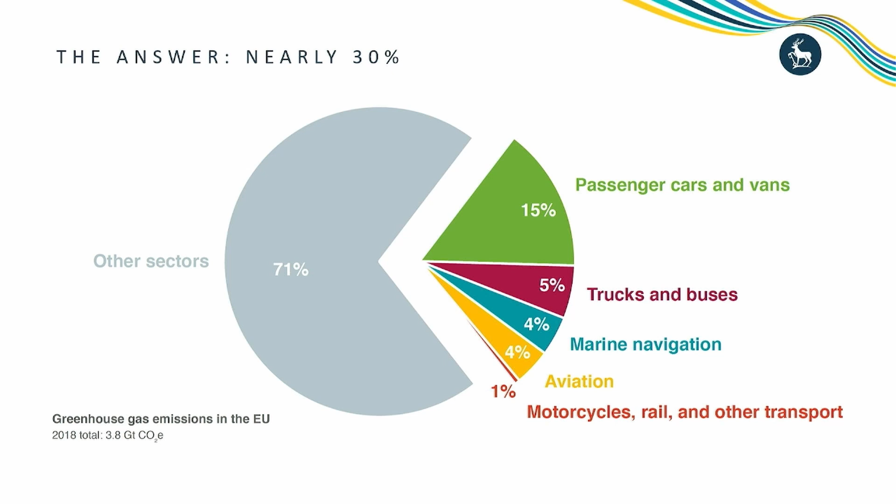And that's why I think hydrogen vehicles, or hydrogen as a fuel, has been on the table to initiate the discussion. I'll try to make my presentation a little more generic because it's IET - we have different engineering backgrounds. So forgive me, it's probably going to be a little bit boring, but I will try to deepen the topic a little with the presentation.

If we look at the normal way, I think quite a lot of us still drive a traditional ICE, internal combustion engine, that is powered by gasoline or diesel. And if we look at really how it works, using octane as an example - traditional cars burn the fuel, so that's a chemical equation.

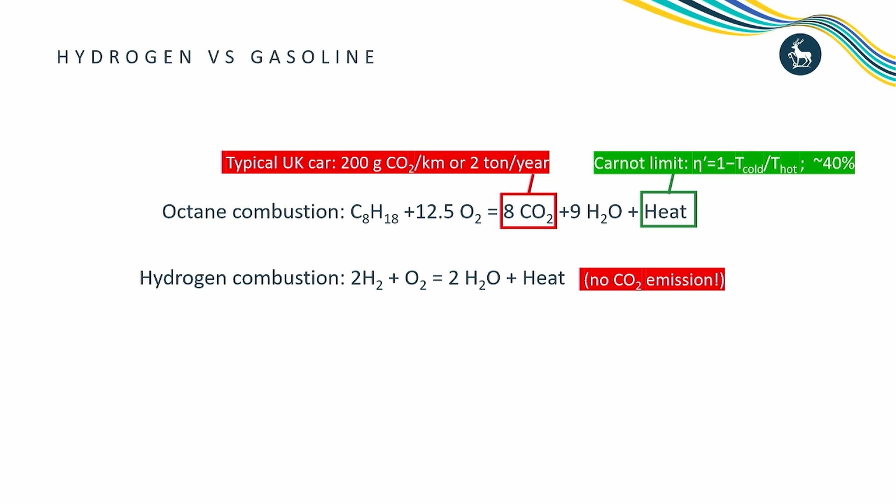And then people look at hydrogen combustion. It's much simpler - you can see if you look at the chemical equations. That's only 2 hydrogen molecules react with 1 oxygen, you get 2 water and heat. That's good because we have no CO2 emission within that equation. So that's a fundamental reason, I think, people try to use hydrogen as a fuel. But if you look at that equation, burning the hydrogen, you still generate heat and then use the heat to drive your engine, then you cannot bypass the Carnot limit. So people start to think, is there a better way of using energy?

So how about if we use electrochemical methods? Electrochemically, you can still have almost the same chemical reaction, but instead of generating heat, you can generate electricity. So when you react hydrogen and oxygen, there's a way that we can release the energy in the molecule in the form of electricity, and then we can use the electricity to drive the electric motor and drive the vehicle. And the benefit of that is you can get rid of that Carnot limit, and there's almost no limit. The only kind of thermodynamic limit you have to deal with is the entropy associated with that. So the overall reaction can be very, very efficient, up to 95% or higher. That's the beauty of using hydrogen electrochemistry - that's the fundamental chemistry of the fuel cell operation.

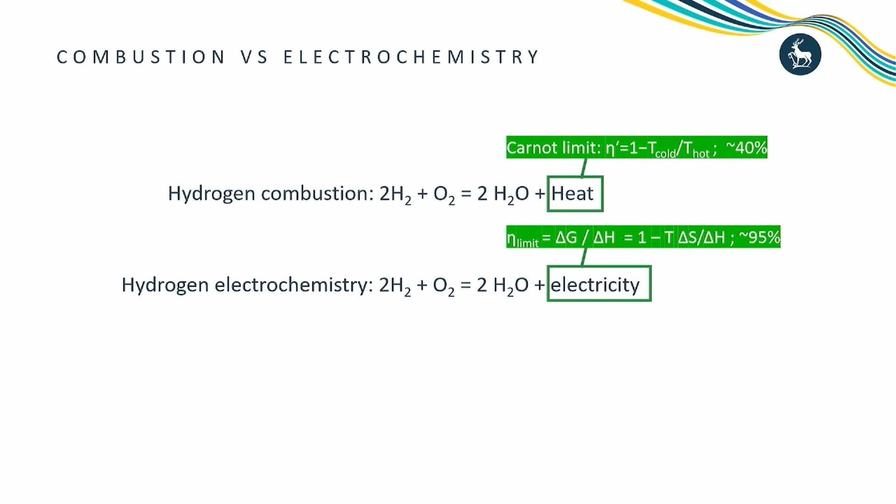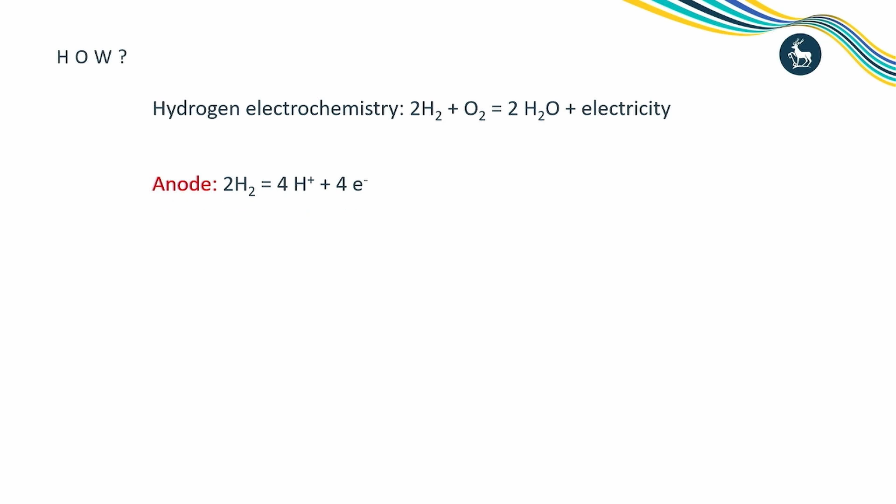Okay, so you will see how, right? Imagine when you put hydrogen and oxygen together and put a fire on that, it explodes and you get heat - that's the traditional way. So in order to generate electricity, you have to split the reaction into two parts. That's the beauty of electrochemistry.

So you want to have the anode side and the cathode side. The way a fuel cell works is you get the hydrogen to be split at the anode side to generate hydrogen ions and electrons. And then what happens is the electrons, once generated - that's the yellow dot - will go through the external circuit. That is, when the electron moves, that's a form of electricity. And then the hydrogen ions will go separately from the electrons through a so-called proton exchange membrane to the cathode side. And then at the cathode side, that hydrogen ion reacts with the oxygen together with the electron that travels from anode to cathode through the external circuit, to generate water.

So through that way, you can see the overall reaction is the same, but if you split that into two electrodes, then you can capture the energy in the form of electricity. So that is the fundamental fuel cell.

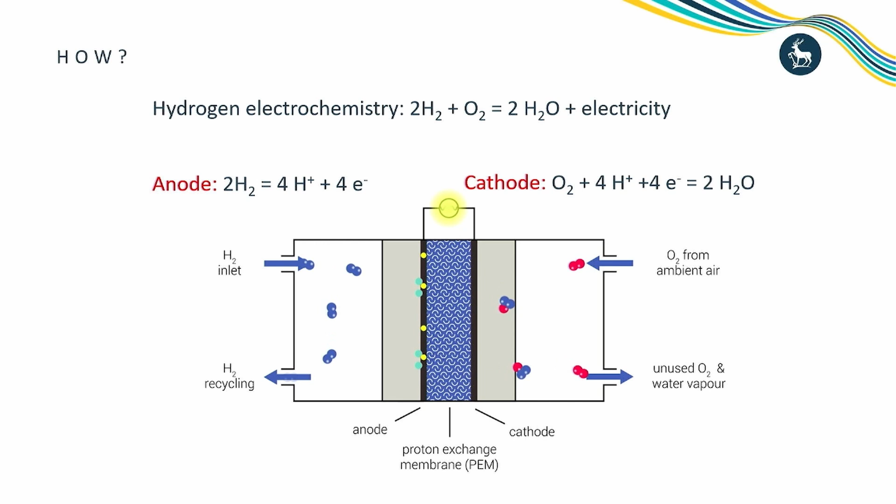And now we have got the fundamental science right, and with a little bit of engineering, you can build a fuel cell car. Okay, so this is the Mirai fuel cell car, probably one of the most famous fuel cell cars.

So basically that's the fuel cell. The fuel cell is installed in the front part of the car. You of course have some hydrogen tank to supply the hydrogen, and then once the electricity is generated, it will drive the electric motor to drive your car, to drive the wheels.

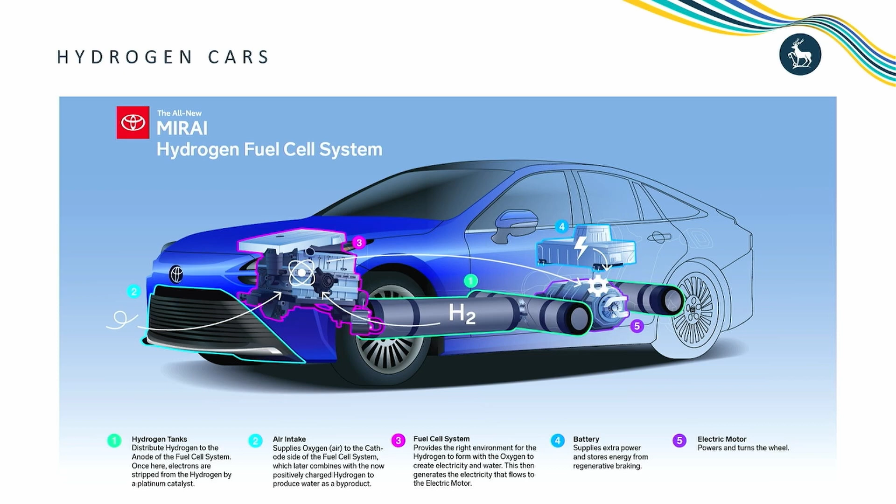So that is the engineering of the fuel cell car. It's always easier said than done. If we look back at the history of the fuel cell, it's almost 200 years ago, invented by Sir William Grove, a British chemist. Actually, he's a Welsh chemist. It's kind of the very first prototype.

At that time, they called it a gas battery. So what they did was have oxygen gas sealed in one of the tubes and hydrogen gas sealed in the other part of the tube, and they inserted two electrodes into the tube. Then suddenly they found, Sir William Grove found, that you can generate electricity. So they called it gas battery.

So Grove was the father of the fuel cell, and you can even find Grove's statue in Woking Park. It's not far away from the campus in the wider Surrey area.

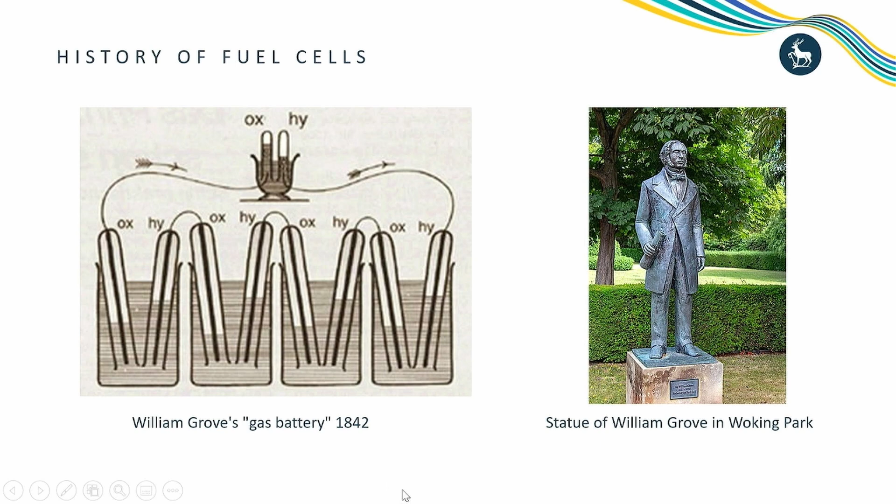As I said, it was invented quite a while ago, but unfortunately it didn't benefit much until the space program back in the 1960s. It's fair because you can find probably 100 better ways of generating electricity than a fuel cell, because it's not a particularly simple process. But NASA saw its potential because in space you want a reliable system, you want a high energy density, and at that time normal batteries couldn't fulfill that requirement. So NASA built the first engineering system of fuel cell and put that in the space shuttle.

So actually the fuel cell is one of the power sources that sent humans to the moon. They are very smart. The fuel cell generates electricity to power some of the service modules. And if you still remember, the only byproduct from the fuel cell is water. So the water can be used as a drink for the astronauts. It's a very close, smart design of the systems used by NASA.

I think that's one of the examples where inventions or technology from the space industry later translate to civil applications. So not far away from this NASA space application, people started to think, can we make the fuel cell that's this big into something that small, maybe we can apply that into a vehicle.

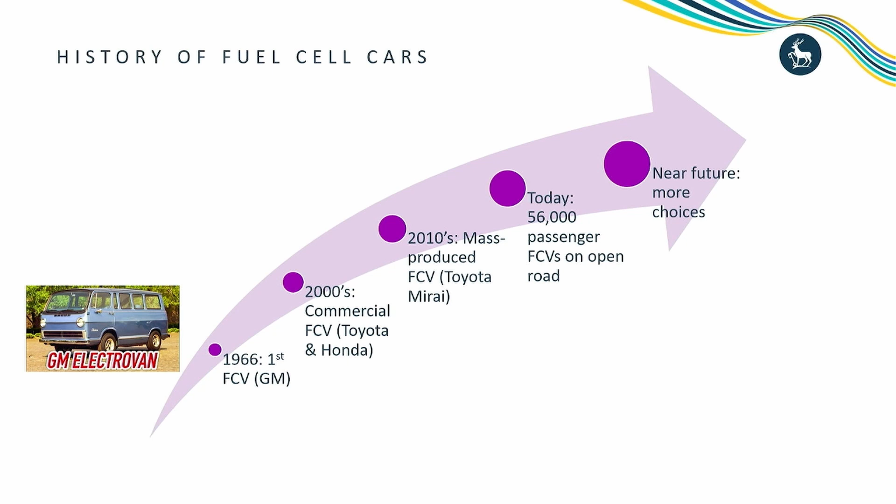But then there was kind of a silent period, because I don't think the need for net zero transport emerged until the 2020s... actually in the early 2000s, we had the first commercial fuel cell vehicles, with major players in this field being Japanese companies, Toyota and Honda. Then in the 2010s, we started to have mass-produced fuel cell vehicles, and the Mirai was one of the most famous ones.

So if you ask how many fuel cell vehicles are on open roads in the world today, it's around 56,000. So it's not a small number, but if you compare with how many electric vehicles are on the road, that's 18 million. So it's only a few orders of magnitude smaller, and then you're asking why.

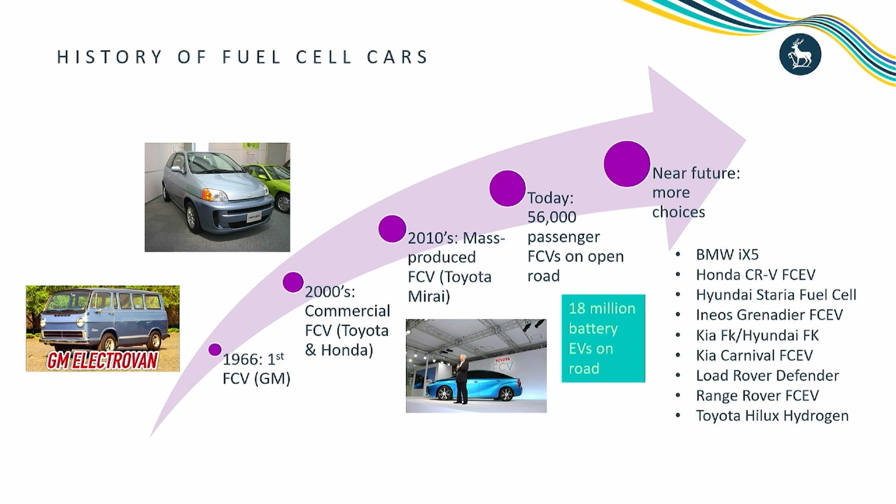So I'm trying to elaborate to start the discussion a little bit more. But there are very strong commercial interests, and a range of car makers are investing. They have plans to develop and sell fuel cell cars in the near future. So there has been some future for fuel cell cars.

I'm trying to do some analysis comparing batteries and fuel cells in terms of technology, economics, and wider sustainability implications. We published a paper two years ago about the future of proton exchange membrane fuel cells for automotive applications in Nature. I will use some of the conclusions from that paper to show you some insights on what the future will look like for hydrogen fuel cells.

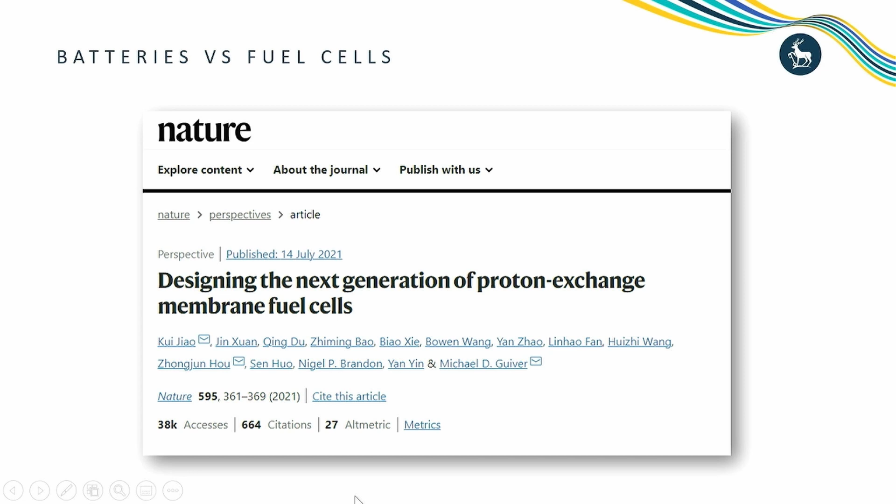To start with, I don't want to go into too much technical detail, but I'll unfold a little bit the technical aspects. When we compare BEV, battery electric vehicles, and FCV, fuel cell electric vehicles, we try to see the differences and make a fair comparison. For storage media, battery vehicles typically use lithium-ion batteries, though the latest versions also use other battery types, with lithium-ion remaining mainstream. Fuel cell vehicles use hydrogen as the storage medium.

If you look at the specification of a vehicle's power source, what are the important parameters? The first is energy density, because it determines how much energy you can carry in your car, which translates to how long you can travel on a single charge.

In terms of energy density, fuel cell takes the win. The battery normally has 200 watt-hours per kilogram, and the fuel cell has slightly higher.

In terms of refueling time, batteries always take hours. Now with fast charging, you can probably charge maybe 50-60% of your battery in 20 minutes. It's improving, but fuel cell charging is the same as charging any fuel - you just lift the nozzle and charge hydrogen into the car, which takes only minutes.

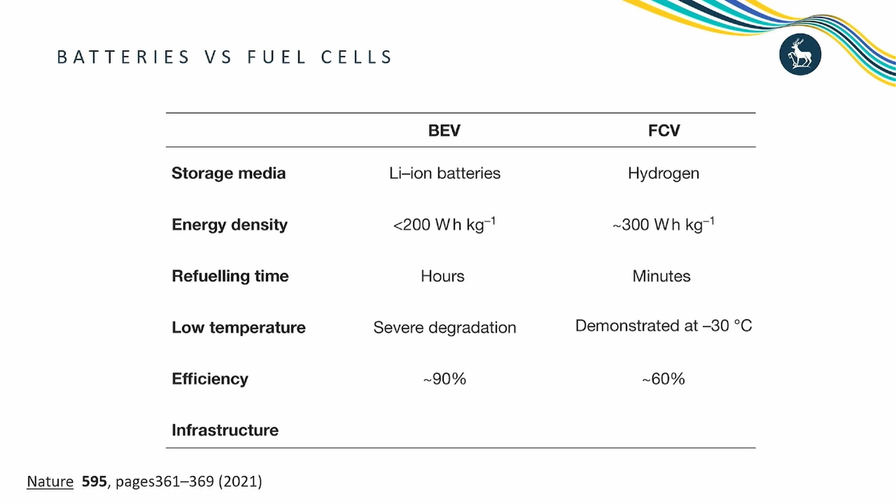In terms of efficiency, here we only talk about efficiency within the car - later I'll show some analysis of the wider life cycle energy efficiency. In terms of energy utilization in cars, battery EV is quite efficient, normally 90% energy efficiency, and fuel cell is slightly lower but still much higher than internal combustion cars, about 60%.

In terms of infrastructure, you need charging points for batteries and hydrogen stations for fuel cell vehicles. To some extent they are both new infrastructure compared to current transport infrastructure, but battery charging infrastructure is developing much faster than hydrogen stations, which I'll go into more detail later.

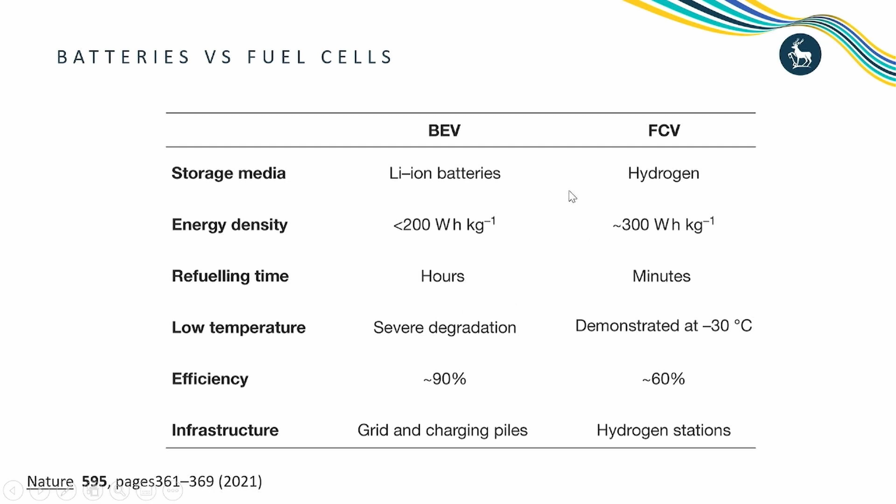If we compare battery and fuel cells, battery seems to win for smaller vehicle sizes or driving ranges, typically city mobility. When you go into long haul or heavy duty vehicles, fuel cell wins, because fuel cell is essentially a chemical device.

There are chemical flows - hydrogen, oxygen, water - within the device, so you need additional pumps and valves. With all of these things there's a scaling effect, so the bigger the system, the better it performs. There's a common consensus that fuel cell will probably perform better in trucks and heavy-duty vehicles, while battery might have a better solution for smaller, lighter applications. Then there's a bit of intersection, an overlap, with medium-range applications.

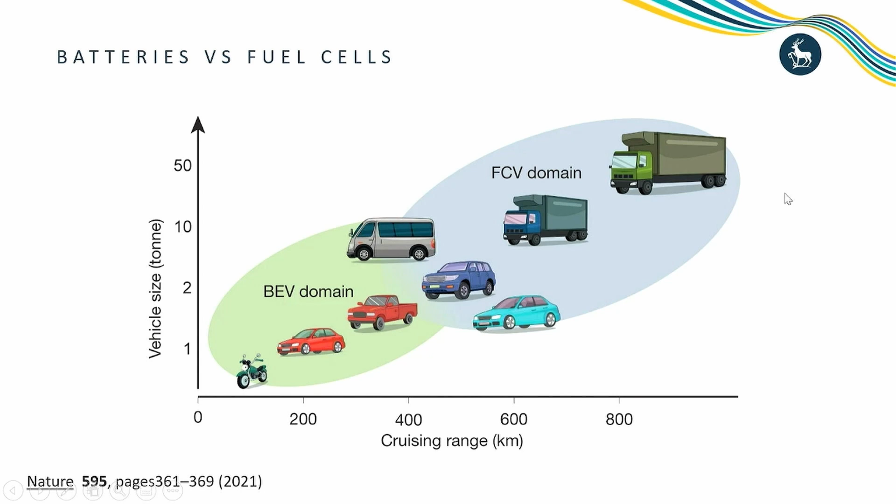We also discuss, because one of the questions we always ask ourselves, is how good the technology is, and how good is good enough? You can always improve the technologies and make them better, but at some point there should be a target and direction of travel, and at some point we will find that fuel cell is competitive enough with battery vehicles or internal combustion engines. So in that Nature paper, we also discuss where we can improve.

Again, I don't want to go into too much detail, but this is just another way of showing the fuel cell in a slightly more beautiful way. If you unfold that fuel cell, you can see the key component is the bipolar plate, a plate that assembles everything together and provides the flow channel for the hydrogen and oxygen or air to flow. It's normally made of metal.

Then there's the gas diffusion layer, a porous layer currently mostly made of carbon paper, though there are discussions of using alternative materials to improve performance. And because it's an electrochemical reaction, you normally need a catalyst.

That's the catalyst layer, between the catalyst layer there's a proton exchange membrane. The membrane is like a plastic membrane, but made of a special material people call Nafion. The function of Nafion is to allow hydrogen ions to transport through the membrane from one side to the other, while not allowing other molecules to pass through. The catalyst is normally made of noble metals like platinum, which is one of the issues we want to address because platinum is expensive.

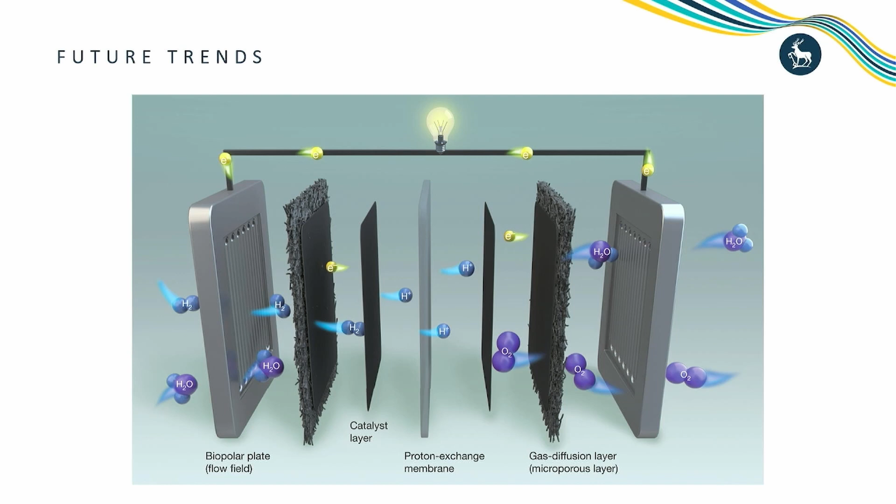We discussed in that paper how far we want to go in each of these individual components, so that when we assemble them together we can make a fuel cell cheap enough or efficient enough to compete with other options. There are also agencies such as the United States Department of Energy, or the European Union, that have targets for fuel cells. We feel, or the research community feels, that if we can achieve that ultimate target, the technology will be competitive enough in the market.

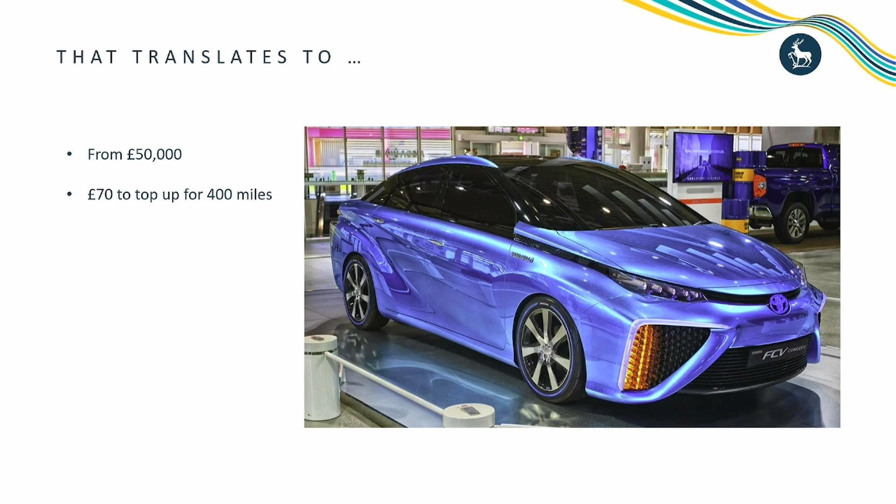There has been a lot of discussion and development in recent years that make fuel cell cars close to market, or already in market, given the competitive options compared with other electric vehicles. But we want to now put that technology into the wider systems, to look at some of the limitations we are currently facing today.

The first question people normally ask is where the hydrogen comes from, because you're going to use hydrogen to power your car. It is clean at the time of use, because the byproduct is water, so it's clean in terms of carbon emission, but also clean in terms of air pollution. You don't have all these nasty SOx, NOx emitted. But if you look at the system from the big picture, you have to ask where hydrogen comes from.

Currently, the majority of hydrogen comes from the steam reforming of natural gas. Interestingly, people are trying to label different colors for different ways of making hydrogen, so it comes with a kind of hydrogen rainbow. Here I only show 5 colors, but in the literature there are probably 10s and 20s of colors, and I don't think any single person can name all the colors of different hydrogen production ways. But here, just name a few.

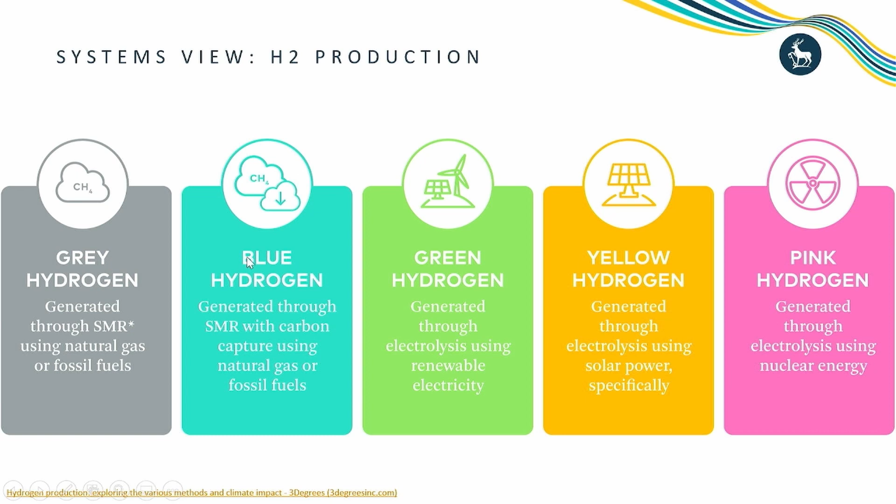Currently we are largely producing gray hydrogen, that is hydrogen from steam reforming of fossil fuels. Blue hydrogen is the same way, but you try to capture the carbon dioxide in the hydrogen production process. We are trying to shift to green hydrogen production, through the electrolysis of water using renewable energy - that's just the opposite way of fuel cell electrochemistry, by the way. There are other ways of hydrogen production, like yellow hydrogen, pink hydrogen. Pink hydrogen is through the same electrolysis process, but using nuclear energy. There are quite a lot of other ways of producing hydrogen.

Different ways of producing hydrogen will have different carbon or environmental footprints, and not all hydrogen production methods are low carbon or sustainable. If you look at this figure, black or brown hydrogen has quite a high footprint. Gray hydrogen is high. Blue hydrogen's carbon is captured, but actually from the life cycle point of view, it's still high. And green hydrogen, depending on how the system is configured, is still variable.

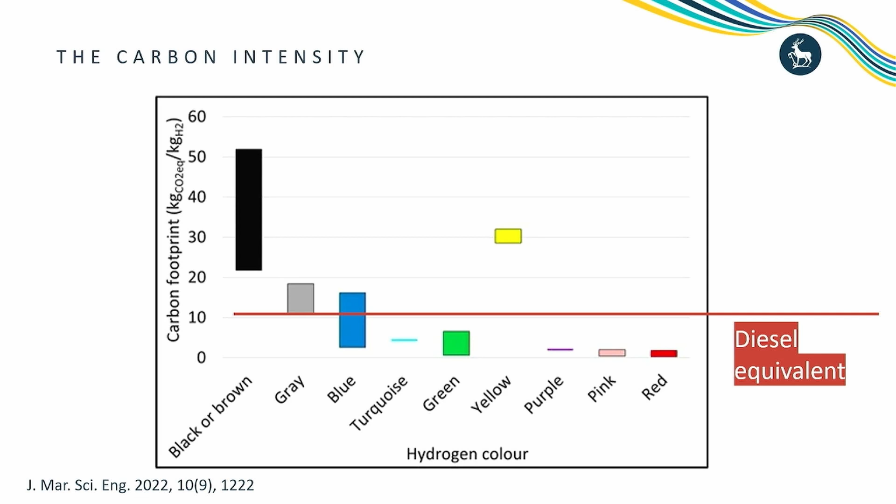What I'm trying to show you here is the diesel emission comparison. You can see that not all hydrogen production methods are low carbon - many of them have a higher carbon footprint even than diesel. So if you use a hydrogen fuel cell vehicle, and the hydrogen is from, for example, gray or blue hydrogen, it does not automatically translate to a sustainable solution. That's one thing we need to consider.

Then the other thing we need to consider is hydrogen storage. We talk quite a lot about hydrogen fuel cells, it seems like high tech, and we tend to forget about the hydrogen storage, the tank, because people think a tank is just a cylinder - a low tech thing. But it is not, because in theory, hydrogen is probably one of the most energy dense molecules.

Especially in terms of mass, that's gigajoules per kilogram, hydrogen is probably 2 or 3 times higher than diesel and petrol, and of course an order of magnitude higher than battery solutions. Because hydrogen is a gas, in terms of volumetric energy density it's not as high as diesel and petrol, which are liquid, but if you compress or liquefy it, it still offers comparable, even higher volumetric energy density than most battery solutions. But that's in theory, that's hydrogen itself.

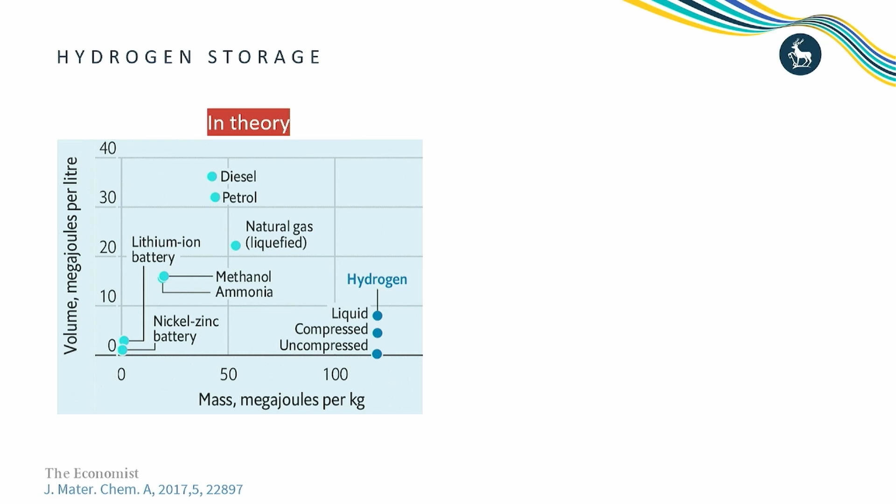It will not give you mileage panic if we do it well. Also, I think one of the key problems is the infrastructure, because many of you think, oh, it's a decent car, but where can I charge my hydrogen?

There has been quite a lot of development recently, because hydrogen has been mentioned many times in national energy infrastructures or strategies. Guess how many hydrogen refilling stations we have worldwide? It's around 814, that's the number I get today. There's a website, H2stations.org, that gives you real-life numbers of hydrogen stations.

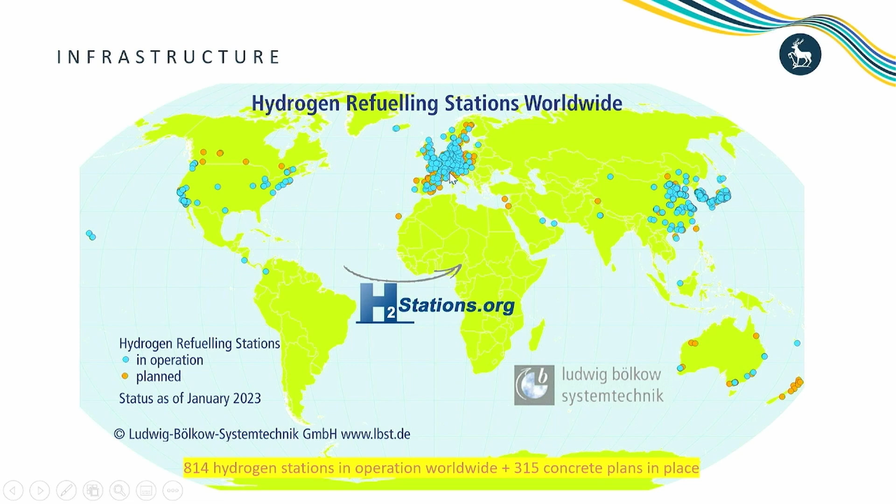The blue dots are the ones in operation, and the orange dots are the ones with a solid plan to be operated in the next 2 years. You can see some areas of the world have a decent density of hydrogen refilling stations, that's the European region and some of East Asia.

If we zoom into these two regions a little more, you can see it is mostly Germany in Europe who wants to develop the hydrogen network. They have a target to have enough hydrogen stations in the highway system, so that if you drive a hydrogen vehicle, you can get recharged within your mileage range.

We have a handful of hydrogen stations in the UK, and there will be more in the coming years, but the numbers are, of course, orders of magnitude lower than electric charging points. Also, Korea and Japan put hydrogen electric vehicles at a higher priority than the UK does, so they've already developed quite a lot of hydrogen filling stations. This is a picture of the infrastructure.

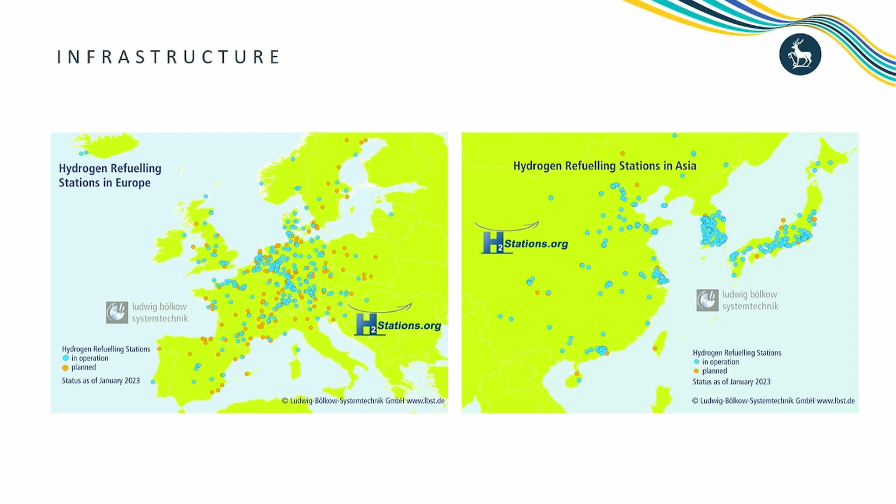So now, the last part is about sustainability, because I think one of the motivations why we choose electric vehicles or hydrogen vehicles is we want to achieve a sustainable future. How to assess that is we use the so-called life cycle assessment technique. So instead of assessing a snapshot of a process, we take the full life cycle viewpoint of an electric vehicle.

If you look at the sustainability of the vehicle, you need to look at the fuel cycle: how your fuel comes from, how it is produced, how it is burned, and when it's burning, what is the emission. That's the fuel cycle.

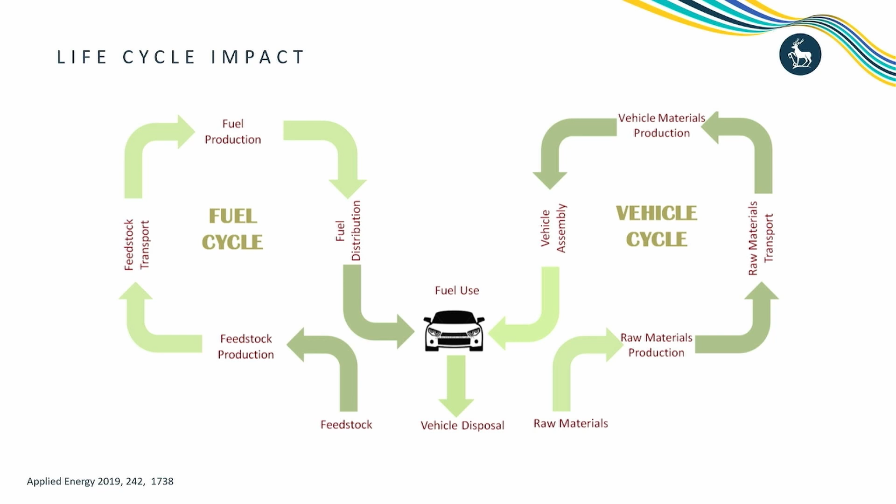There's also a vehicle cycle: what are the raw materials of making that vehicle, and what is the environmental impact when you produce those raw materials and convert them into the components of your car. At the end of life, we need a proper disposal of the vehicle. Each step has certain environmental impact in terms of carbon emission, but also in terms of ecology, toxicity, or wider environmental impact.

People have done quite a lot of life cycle assessment, and the hotspots, I mean the problems, exist for both battery EVs and fuel cell vehicles. The issue for batteries is really the cobalt and nickel. We've heard a lot of stories recently about ethical mining of cobalt and nickel. Battery EVs are very clean at the point of use, but when you try to get this nickel in other parts of the world, it has generated quite a lot of problems, both environmentally and ethically.

Fuel cells have a different problem, mainly the platinum, which is used as a catalyst for the electrochemical reactions. One of the efforts we are trying to do is to lower the amount of platinum used in fuel cell systems, and as the technology matures, we can use less and less platinum, trying to reduce the environmental impact.

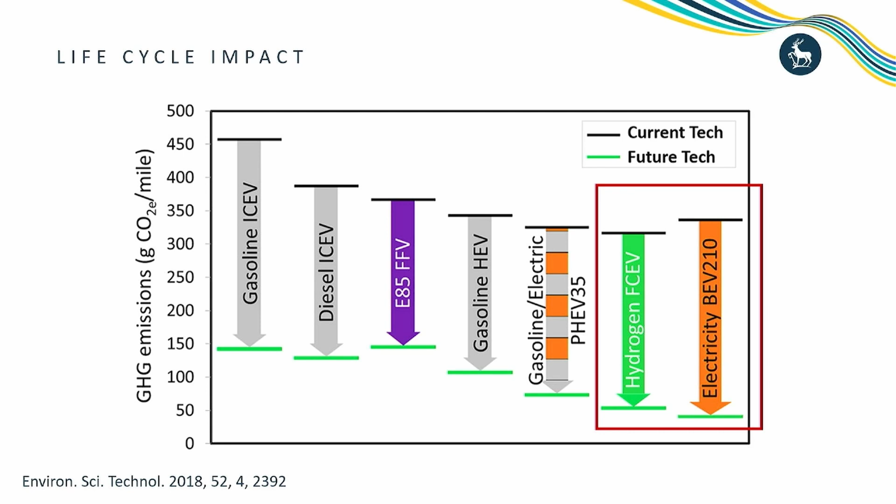If we consider everything, the fuel cycle and the vehicle cycle, there are quite a lot of LCA studies in the literature with slightly different results reported. But I think the consensus is, if we compare hydrogen fuel cell vehicles and electric battery vehicles within current technology, hydrogen fuel cell performs slightly better in terms of sustainability than electric vehicles. But with future technology advancement, both vehicles' environmental impact will go down, and probably in the future electric vehicles will slightly win over hydrogen vehicles.

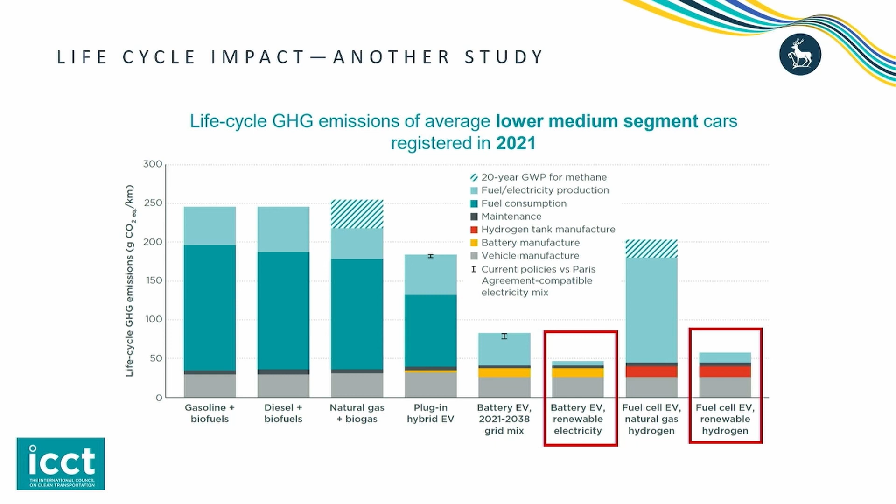In some studies comparing battery EVs and fuel cell EVs, sometimes fuel cell is slightly better, sometimes battery is slightly better. But the overall story I'm trying to tell is both are quite sustainable solutions, especially compared with current gasoline engines, and especially when the electricity and hydrogen come from renewable sources.

Okay, so the last part is just to come back to the title. Does hydrogen fuel cell vehicle have a future, or is it not the future of driving? I hope I've given you enough information that you can make your own judgment, but I want to throw a few different voices, because there's no definite answer, unfortunately.

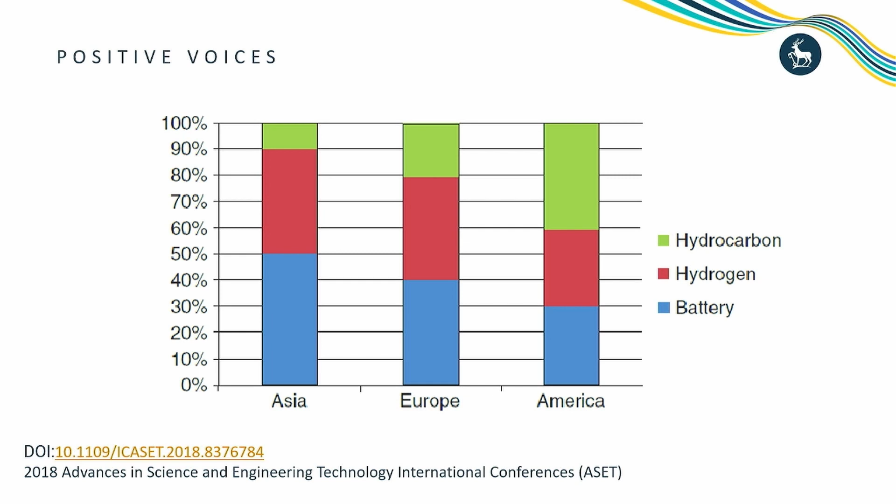Different people have different voices. For example, the European Climate Foundation gives predictions on the role fuel cell will play in the future transport mix. They predicted that by 2050, more than 30% of new car sales will be hydrogen fuel cells. This is from a conference paper, and they're even more optimistic that almost half of new sales by 2050 will be fuel cell cars, which I personally don't believe.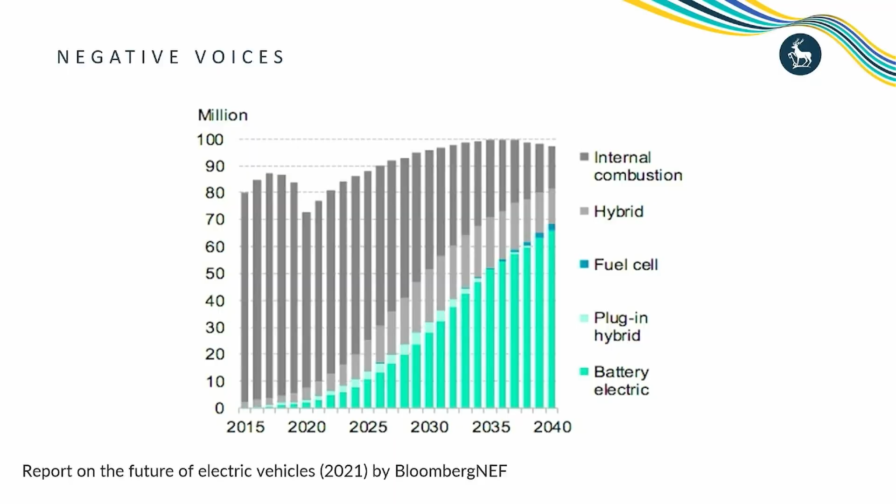They use different data, different models, and most importantly, different scenarios. My consensus is that the more environmental, the stricter the net-zero push you want to go, the more you will see hydrogen fuel cell in that picture, because it goes back to the point that in order to decarbonize the transport sector, you have to consider both city mobility and heavy-duty vehicles. I think fuel cell will definitely play an important role in heavy-duty vehicles, but also in some part of city mobility.

Okay, so that's the end of my presentation, and I hope you find it useful. This is quite interesting as there's a lot of debate, so maybe you will agree or disagree with me, but I'm very happy to open it up for discussion or questions.

Thank you very much for such a fascinating and informative presentation. Electric vehicles are heavier, which obviously has implications for infrastructure, multi-storey car parks, and also tyre particulate emissions. How does the weight of hydrogen cars compare with internal combustion and electric?

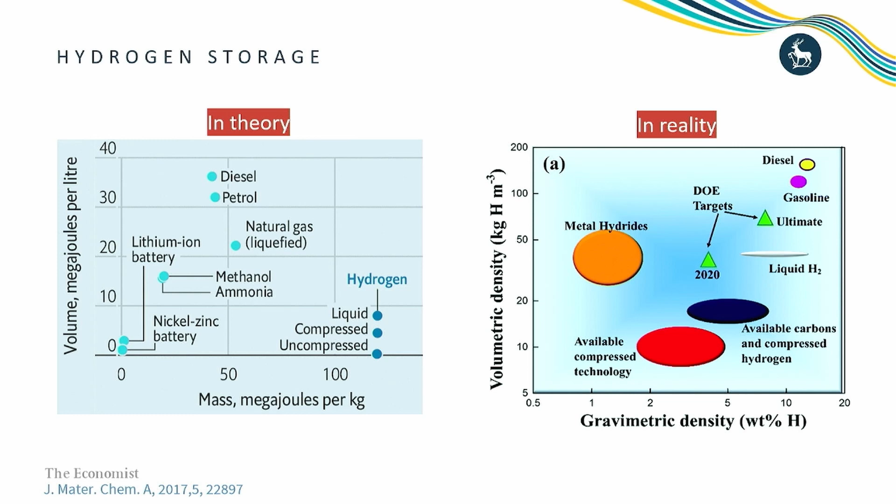So you mean in terms of weight? Yeah, I think that's been shown in some of the diagrams before. It's essentially about energy density, because we have different ways of measuring it, in terms of volume and in terms of weight. Hydrogen has, again, a higher energy density in terms of weight. Electric vehicles are slightly heavier, not that much heavier, if you compare 200 and 300. So a fuel cell vehicle can potentially be lighter, but you also need to think about the fact that the energy storage part is only a proportion of the whole vehicle. So in current technology, fuel cell wins a little bit, marginally.

Yes, I'm thinking about the weight of the whole car with everything, all the tanks and all the parts you need. So are they significantly lighter than electric? You mean heavy duty? Yeah, the total weight of an actual car on the road compared to internal combustion and electric. It's almost the same, it wins a little bit.

Can I? Thank you very much. Thank you, yeah, great presentation.

Thanks a lot. You quoted the 200 to 300 comparison between a battery vehicle and a fuel cell vehicle. That was watt hours per kilogram, if I understood correctly. Was that kilowatt hours after the efficiency or before? Because, that's after the efficiency. After the efficiency, thanks very much.